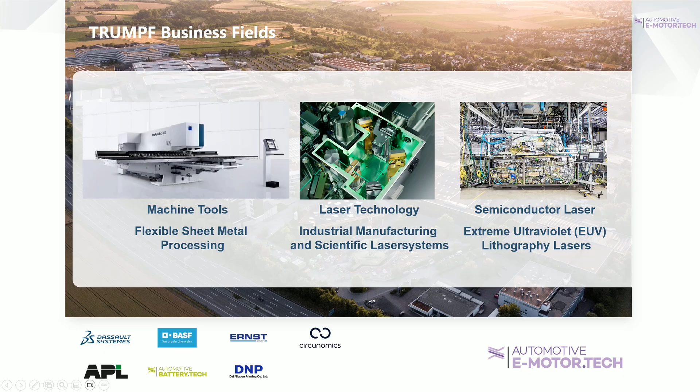So for those who don't know TRUMPF, we're like a family-owned business. We do laser technology. It's all about the lasers. We're in the main markets, etc. Our HQ is nearby Stuttgart. That's all the facilities where we make the lasers and do some of the machines. And our main areas are machine tools for sheet metal, the laser technology, which is the biggest chunk in automotive, and semiconductor laser.

And maybe some of you have heard about what's being called the EUV laser. This is the one going to the Dutch company ASML, which is used for producing the latest generation or the future generation of microchips. And this is our former CTO here, Mr. Leibinger, who's one of the families running the company. And he was stating that without this laser, Moore's law would have come to an end, which has a big economical impact, and is certainly a technology that, if you have it in your hands, also raises interest from politics, etc.

And that's why if you walk the Brandenburg Gate, there is one TRUMPF flag flying over, and this is certainly not an office for selling lasers, but to talk to the guys who are interested in that technology. Yeah, and that's basically our operational mode. So we do lasers, we don't do the machines. So in that case, it's ASML. And in the case of the automotive applications, it's usually some machine or line builders which just take our system as a core component in order to do something which wouldn't be possible in any other way.

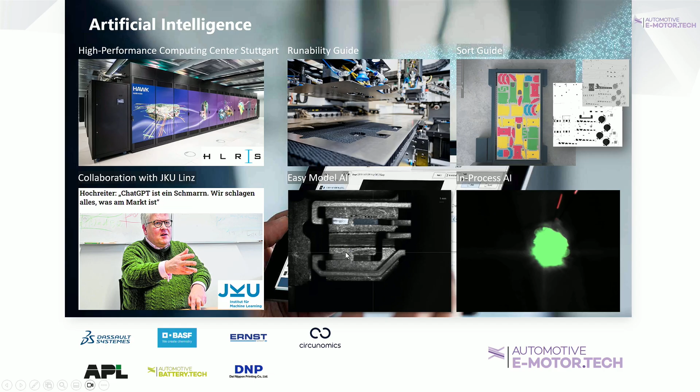At the moment, we're focusing pretty hard on everything which is somewhat related to artificial intelligence. Most of the time in order to improve our systems, to make them run much better. I will show you one of the examples later on. So this is like high-performance computing. We work with some of the masterminds in AI. So, for example, Dr. Hochreiter was one of the guys who actually gave ChatGPT the core programming stuff and got no money for it. I think he's pretty much upset about that, but he's still working at advancing his stuff. And so we have collaborations with those guys.

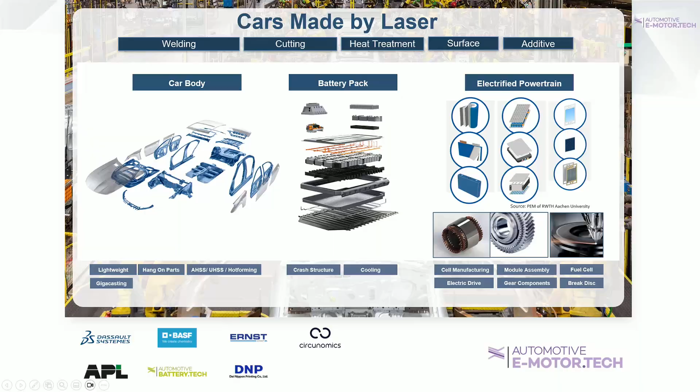In the cars, lasers have played a role for the better part of the last 20 years. So there's obviously a lot of applications in the car body. This is like welding doors. This is cutting of B-pillars, where there's only the laser cutting available. And of course, we do dedicate to e-mobility. That's why there's a lot of applications in the joining and contacting of the battery packs, and even more specifically in the electrified powertrain. So battery manufacturing all the way, fuel cells, and you can think of all of the components which belong to a drivetrain, including, of course, the electric motor.

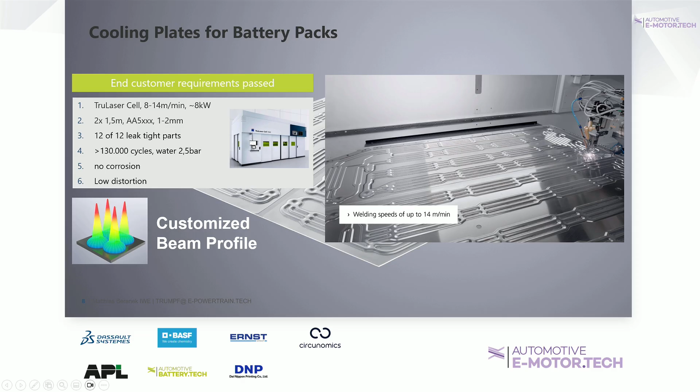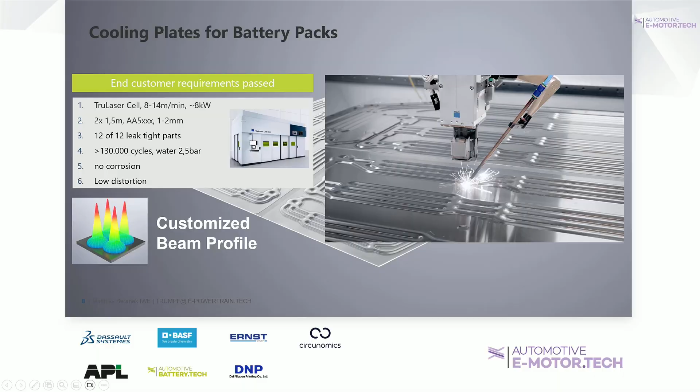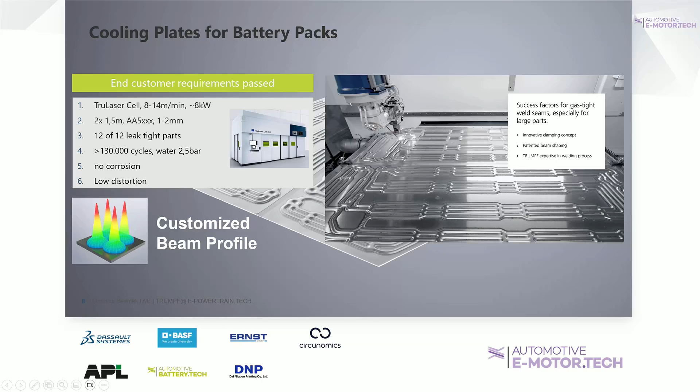I brought you two examples, just so you see something different than an e-drive. In this case, this is a cooling plate for a battery. So that goes under floor. And what needs to be done there is actually to have a liquid tight welding for a few 10 or a few 100 meters of seam length. And for that, we have developed a new technology. So usually we refine already existing industrialized laser systems to take over a new application, a new topic. So in that case, it's liquid tight welding with a special sort of laser beam arrangement.

And then, while we're at it, we also carried it over to, for example, power electronics housings. I don't know who's familiar with welding in here, but die cast welding is one of the most difficult things because it generates a lot of porosities. And we successfully carried over that technology to seal off inverters or BMSs in order to actually get gas tight, because that's a specification we got. We dealt with it, and so we can apply this technology to different applications.

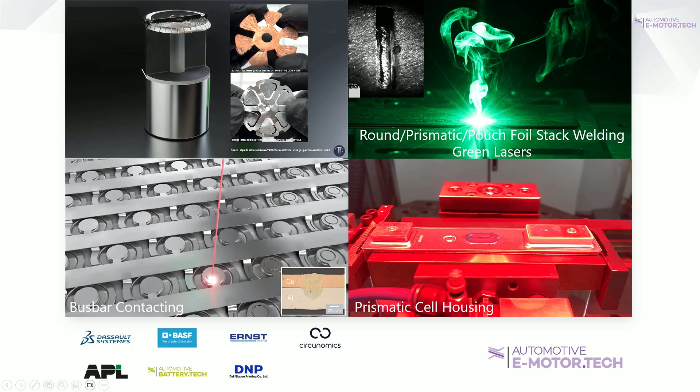We've developed special lasers for that. They're actually green, so you can see that. And that has to do with the susceptibility of the copper material towards green laser light, so it takes in the green light more efficiently than any other high power laser light.

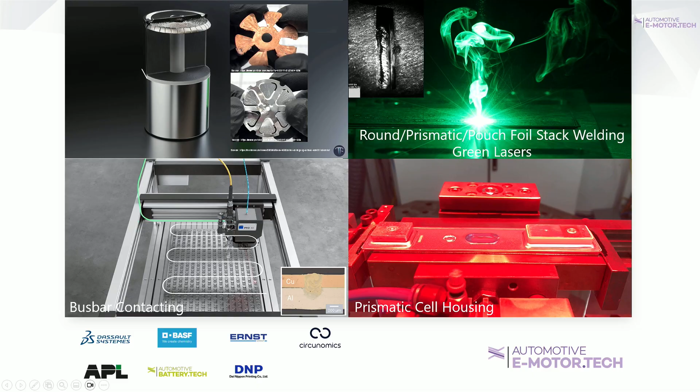Then the busbar contacting, this is very popular for each type of the battery cells, whether it's round, prismatic, or pouch. There are always busbars also on each level of the battery build. And you can see that this is being done with so-called scanning optics. What's nice, in many cases we can just mix the materials when using the laser. So welding copper to aluminum is quite a common thing to do there. It's working quite well. And this is due to the specific arrangement of the laser.

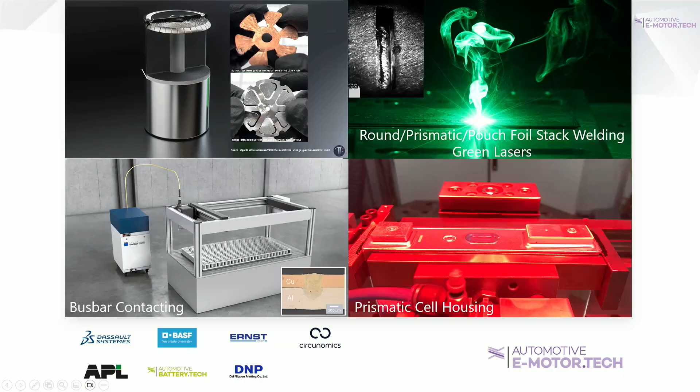And here you have to look very closely. This is the next generation of prismatic cell housing welding. This is a very, very popular application. And you can see that the next generation of that will be 3 times as fast as it is today. So very quick.

And for example, the differential is one of the parts which has been laser welded for 20 years or so. There's a very high experience for that, so you just have to go for it. Also very close to the E-drive then is of course the inverters. And there is an increasing interest in replacing the bolted connections by a laser welded connection.

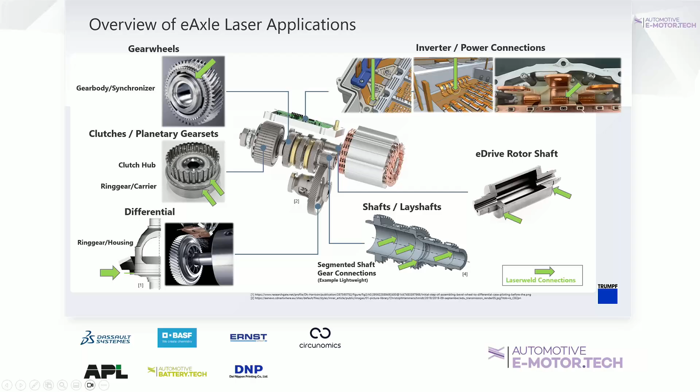All right, and then we have the E-drive. This is what I'm talking about in depth today, where mainly for us it's the hairpin technology, because that's been used by literally anyone now, at least for the larger productions. And the main application is of course here the welding of the open ends, hairpin welding, and also the decoating, that is welding preparation, you can say. The connection of the phase connectors or busbars, and you also see that here a little bit.

Also the stator cores are being laser welded. That's most of the time being done in tier 2 or tier 3 suppliers somewhere, but they also could or would be using lasers.

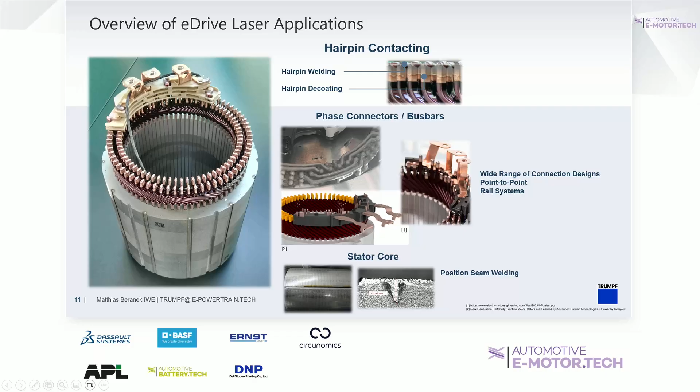All right, for those who don't know, I will very quickly take you through the processing chain. You can see it's rather long. The laser is here, so the crown welding and the contacting. And this, unfortunately, is a point where the product value is already quite high in terms of value add. So we are most of the time not really allowed to have any failures. At the same time, we have a very, very high number of connections.

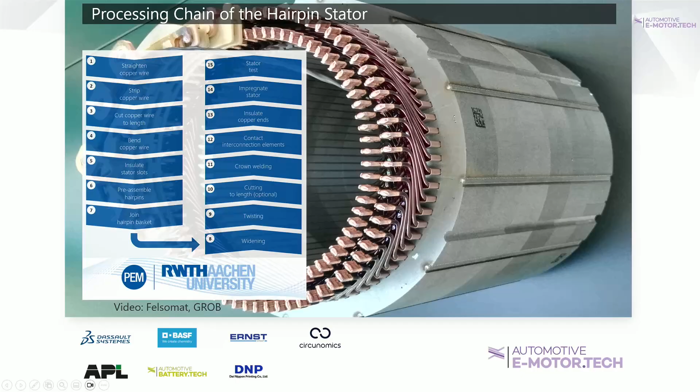So if I think 10 years back, there was one part, one laser weld, everything was fine. If one part was bad, you just threw it away. That has long been gone. And that's what we've been dealing with for the last 10 years, you can say. Right.

First step is the so-called forming. So that is all which leads to actually having the U-pin. What you could see here is a sequential machine. Right now, in that case, the Wafios company is capable of producing 1 pin per second. That's the cycle time of those machines right now, which includes already that laser decoating operation that was not seen in this video, but it's there.

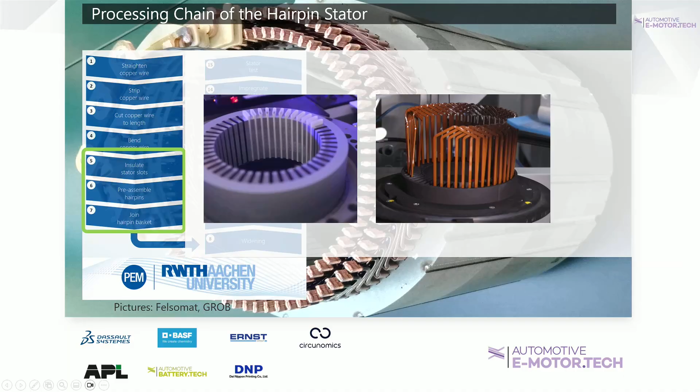Then you prepare the stator core, so you put in the isolation paper, then you arrange the U-pins to put them by means of grippers into the stator core. And then you have the two processes, one of which is the so-called widening, and the other one is the so-called twisting to have that distinctly twisted crown on the upper side. And then I just skipped the laser welding for a moment.

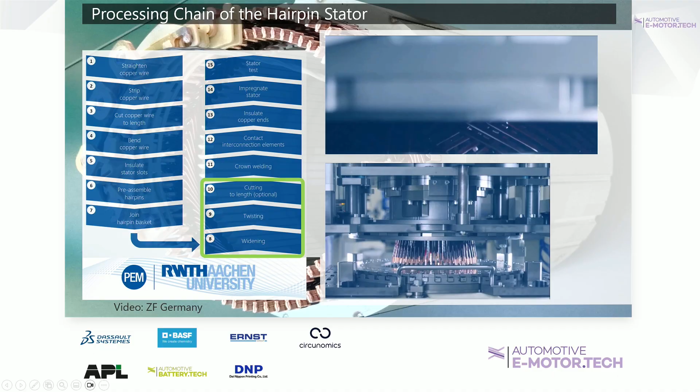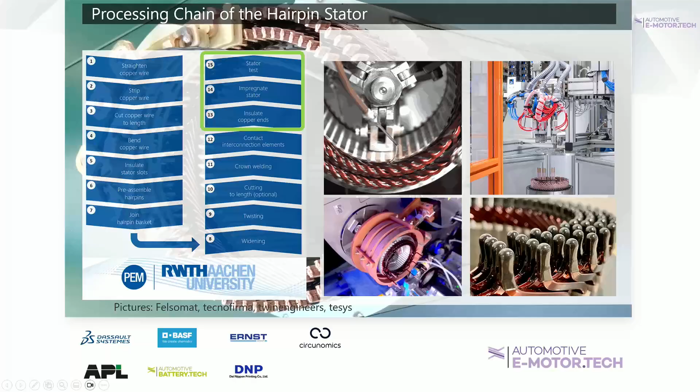So after laser welding, there's only very few steps left. All of them have to do with isolation, either of the welded open ends or the trickling and isolation of the whole slots. Both of them are working with inductive preheating, so you heat up the part, you apply the isolation layers, in that case liquid. In that case, it's like powder dipping, and this is how you go to your isolation, and after that, there will always be some sort of end-of-line testing.

All right. As I mentioned already, the part is very expensive once arriving at the welding station. That's why it's not only a laser which is used there. It's a whole system with a lot of sensors. So we got the laser beam source supplying the light for the welding. We have scanning optics. And then there's a whole battalion of sensors. In any case, I will show you the positioning sensors and also the OCT, and also how we apply the AI and some of the adaptive processing.

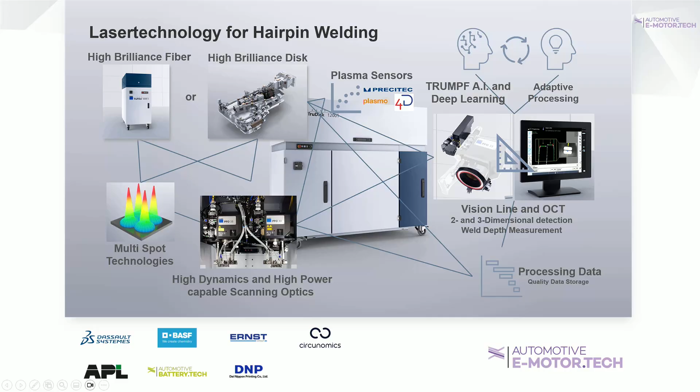Like I said, the laser system, as just shown on the previous slide, is closed. So it's capable of running autonomously, more or less. What we need is only a start-stop from any sort of machine that is supposed to weld that stuff. And this keeps the system open to a lot of machine building companies who are capable of supplying production lines. This is why we scaled so quickly, especially in Europe. And that's also why we can adapt to new sorts of motor designs, like the axial flux motor, for example. I've got an example later on for that.

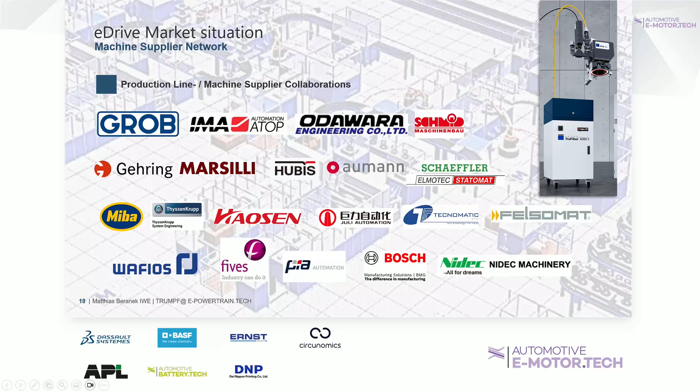And all of those companies have done several projects already. Still, the biggest player, at least in Europe, is certainly the Grob company. They are very famous for producing hairpin stator production lines, and they will use the laser system at one point.

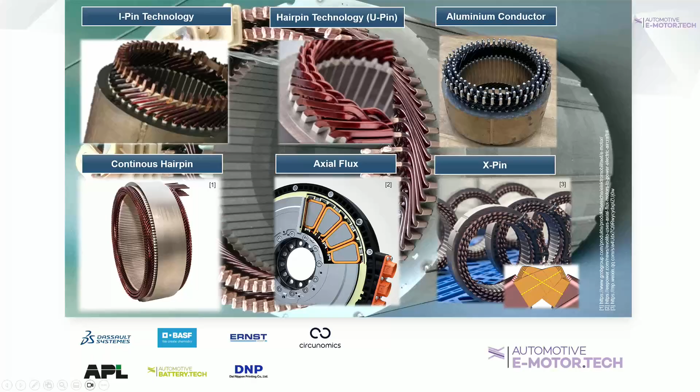Welding-wise, we have developed approaches and processes for each of the types you can see on this slide. I will show them later in more detail, and most of the time it's just about the adjustments we make, for example, for the parameters, and a little bit for the welding strategies we apply. What's good is that the specific system we're using would be applicable for all of the shown products.

Right, at the moment we have 700 high power laser systems installed worldwide, which means we scored pretty much every project. And that should be somewhere between 300 to 350 production lines already.

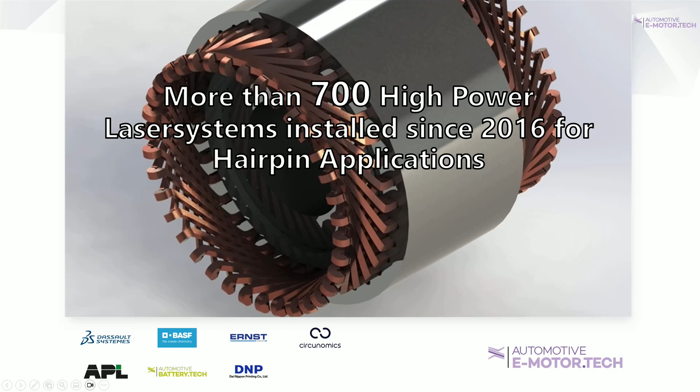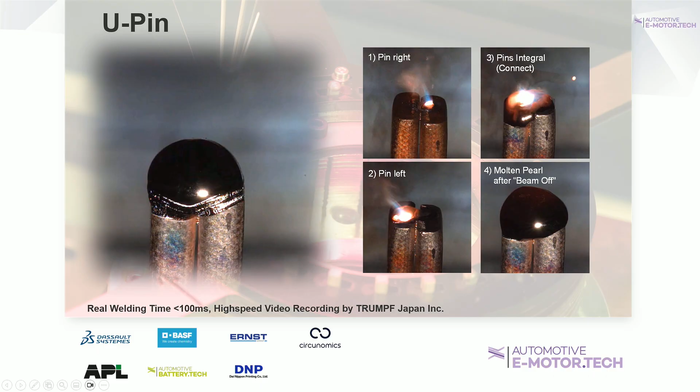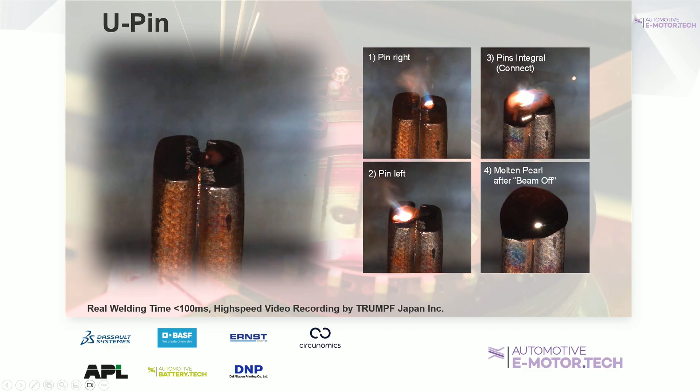All right. So just so you've seen one of the contactings, we usually use a strategy which is melting the first pin, then the second pin, and then there is some sort of integral movement over the 2 pins in the end. All of the videos you're seeing of welding are high-speed videos, so in that case this was a 100 millisecond weld. Then you do this 200 times, and then you got a nice little stator ready for putting in the car.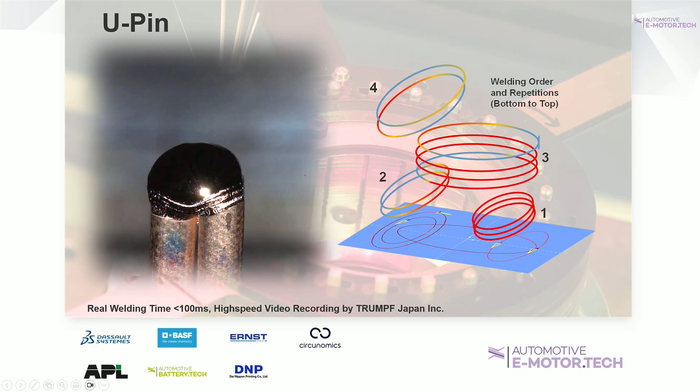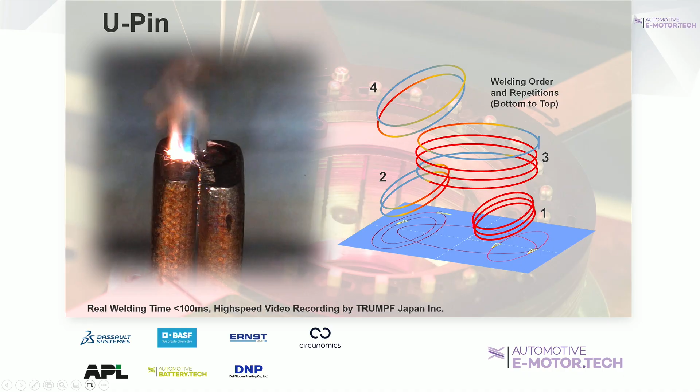The laser is highly controllable, so that's an example sequence of the weld. You can see we do some jumping around. We can also control the laser power along the single paths. The laser light is actually the quickest. We can regulate it within some microseconds because it's a real-time path and the speed of light is obviously very quick. So we can even do fine-tuning like that.

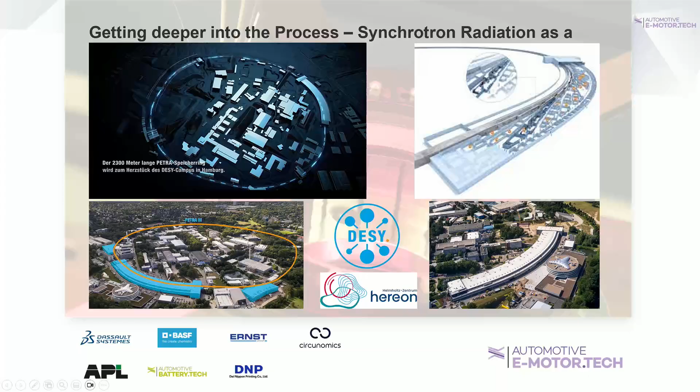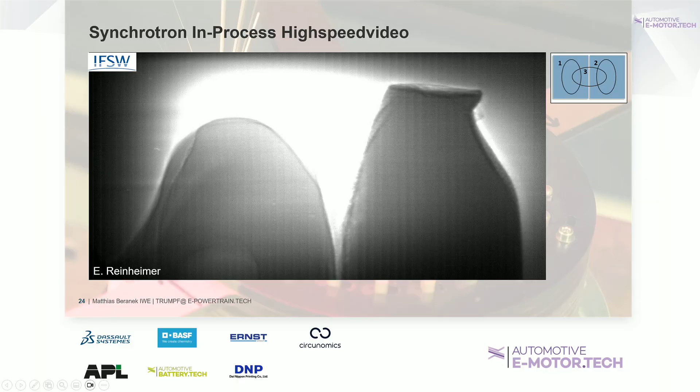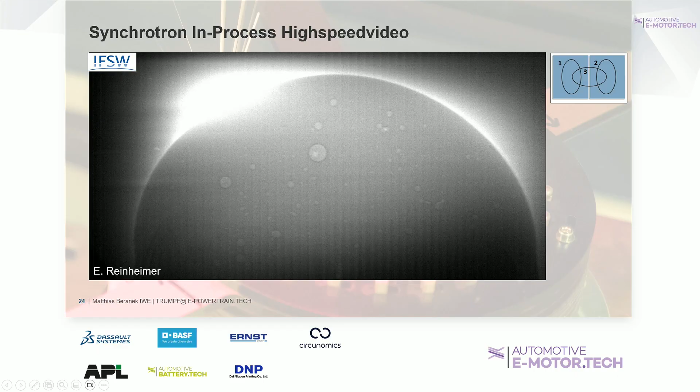And to get even deeper into the application, that's the synchrotron facility in Hamburg. It's a particle accelerator. And we pretty much misused it to build a high-speed camera based on X-ray, because the particle beam has very high energy, so we can do an X-ray through the parts while doing the welding. You see how the laser is going in here and how we connect the part. You see how porosity is formed during the weld and also how the porosity is removed during the weld. To get the understanding necessary to do that process properly, we have to go to quite some lengths at some point. But it's also a lot of fun, I can tell you that.

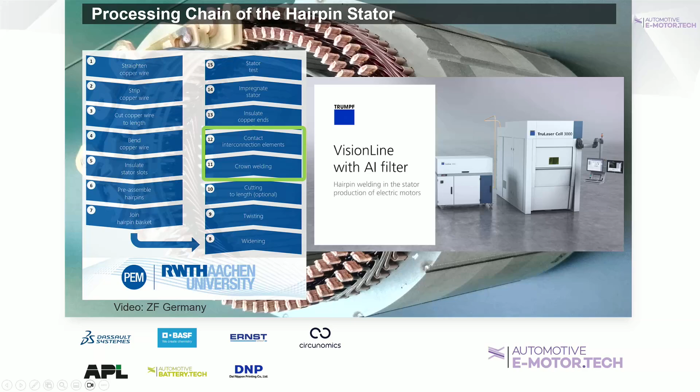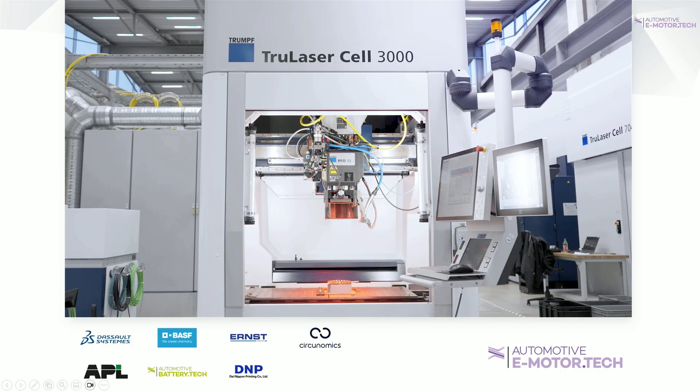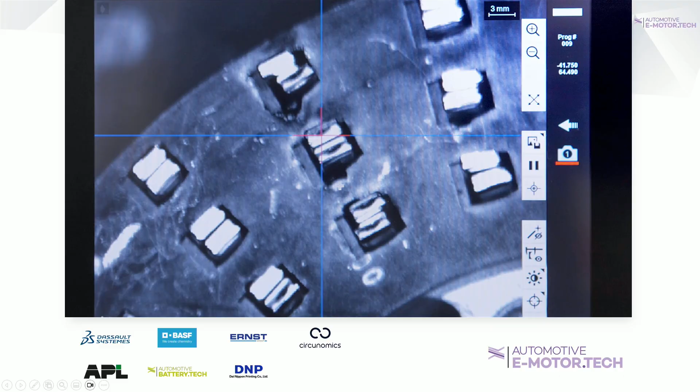We have the sensors, which I mentioned. We have a camera, and camera detection actually was based on grayscale, edge finding, and so on. We changed it, so our detection is completely based on AI. And just so you've seen a welding process going on inside a machine, that's the optics again, with all the sensors in there. That's me. And this is how the thing is programmed. It's not that interesting, but what is interesting is we detect all of the pins, either sequentially or all at once. There can be different modes. And this here is showing what the problem is with the standard detection.

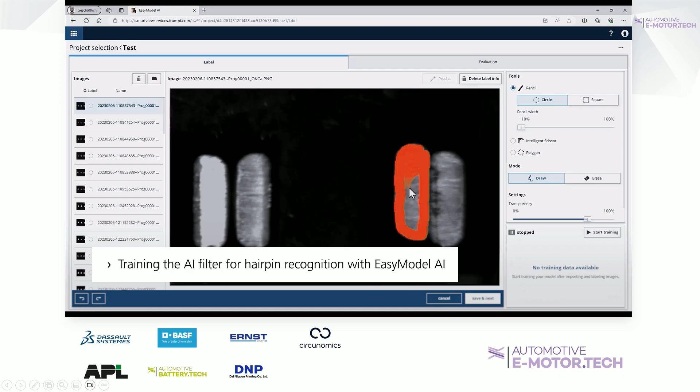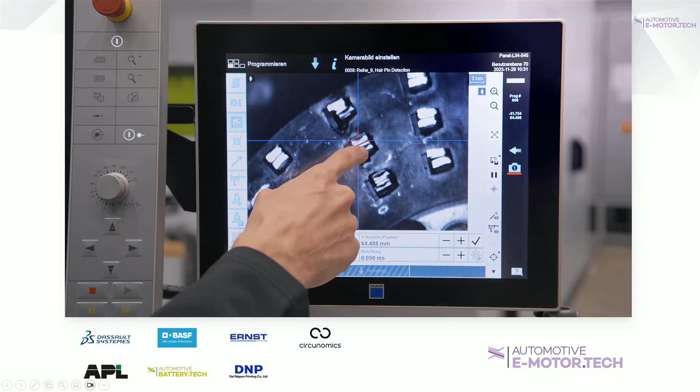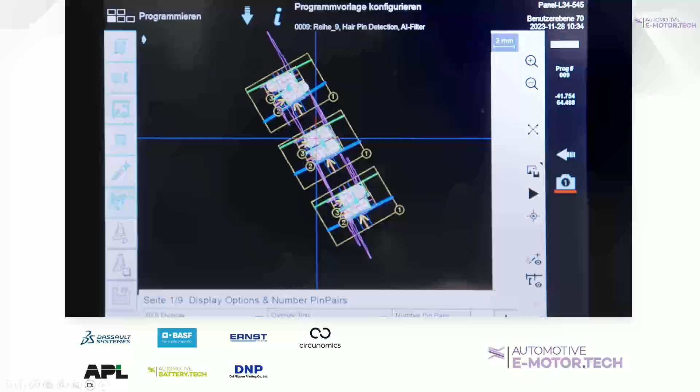And we solve it by AI. Here you have how we train the AI, actually. This is by manual labeling in the first place, where we have developed a very good few-shot learning, which means we make 2 or 3 manual trainings, and then the AI can already work on predicting the parts. And then we basically just switch it on, and magically there is no more problem with the detection.

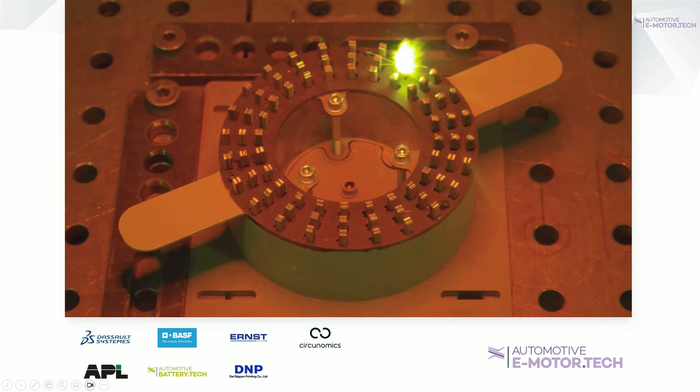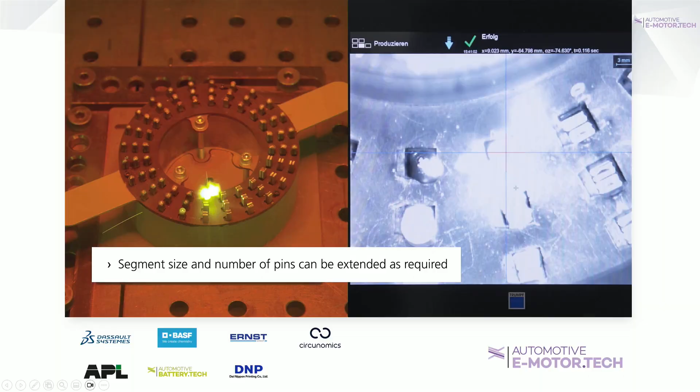And this was basically something we, of course, had to deal with for quite some years in the beginning. So there were always some faulty measurements, stuff like that. It's just about the statistics. If you make millions of detections per day, certainly one of them will go wrong. And we've brought down the failure rate quite dramatically by applying that AI. All right.

So then we have a little extension. So we not only use it for detecting the parts, we also can use it for controlling what has happened, to check on the result. And so what you see here is, of course, a mock-up where we applied different failure modes within the stator and just trained the AI to also detect failures.

Because what's possible in the welding station still is that at some occasions we can apply what's called repair strategy, which means that you have the chance again to bring up the yield rate a little bit more, to make a part which otherwise would have to be reworked or something. You can still weld it within the welding station. And so for that, we use the advanced detection here. So that's also a feature which is possible.

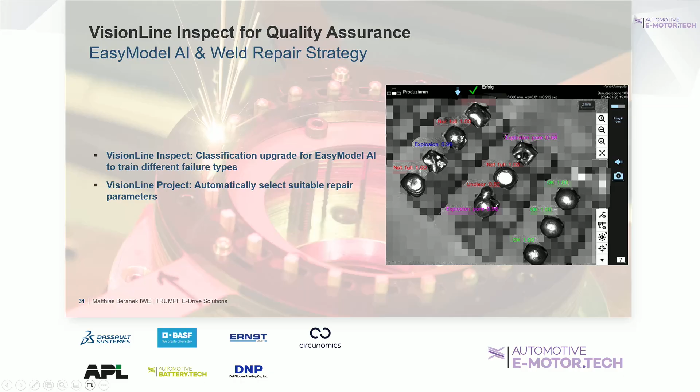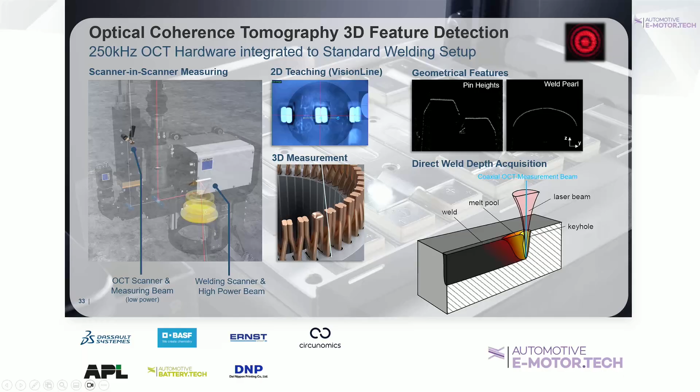Right, and then we have optical coherence tomography. So that's now a direct measurement. You also see it's a different sensor. So that's also a laser beam, but it's more or less powerless. It's like a measuring beam. And besides just scanning for geometrical features like height differences or the welding result, you can also measure the weld depth, which has been considered like the holy grail of laser welding, to actually get to this very concrete and good information. That's basically the most information you can get out of a weld.

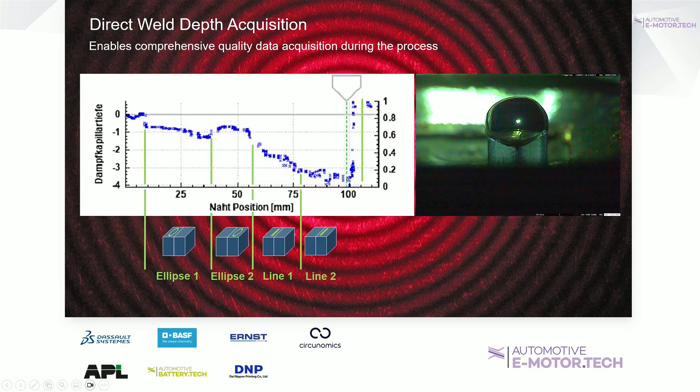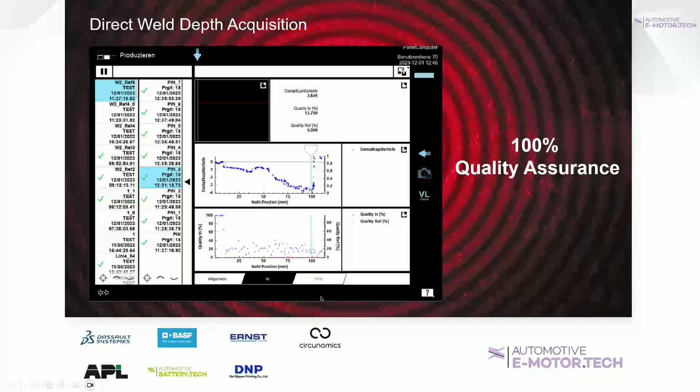And here you can see it going down. So the welding depth is basically gradually increasing as we go on with the welding on those pins. And this is pretty much the first time we get this high degree of information out of one weld. And that's also the point where we can actually go to a 100% quality assurance, because that's running with each and any pin, and that's not possible in today's production. Today's production is sample testing, most of the times using a CT scanner, which allows for only a few parts per hour maybe, and we would be able to detect any weld which is going on.

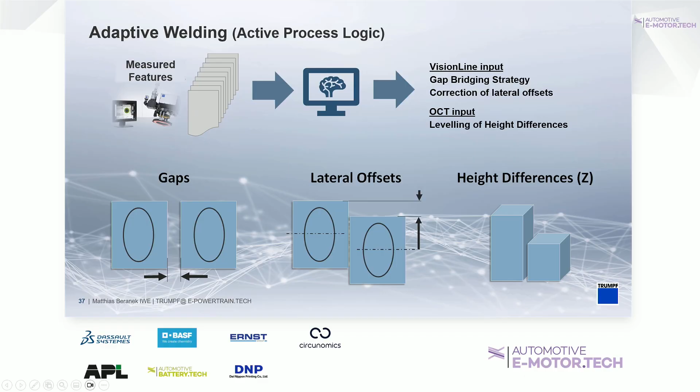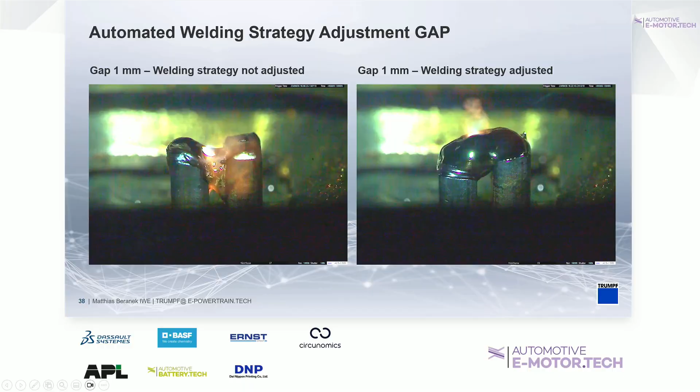Yeah, and with all that information, we also go into adaptive welding, adaptive processing, which means once we got the information from the camera or even from the OCT, we can still try to apply parameters which are more suitable to a certain situation which can occur, which I've pointed out here. So those are the typical things which can happen in a production environment. And what we do then is to automatically adapt either the strategy or just some parameters of the laser in order to get to an acceptable welding result.

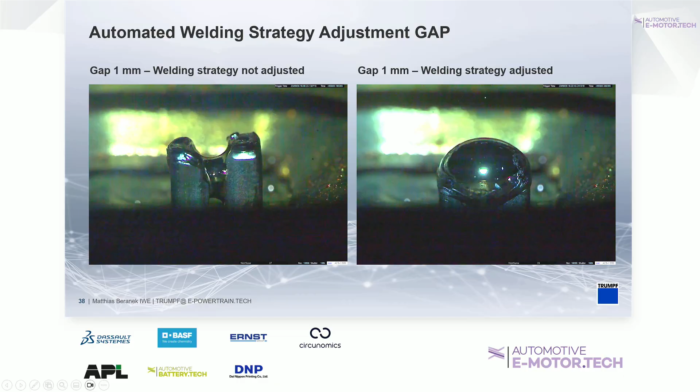So you can see that this is the more common case. So if you have very strong deviations in your parts, that's certainly not a good welding result. And on the right side, we've just used the information coming from the pre-measurement indicating that there is a gap, and then we adapted the parameters in a way which are suitable to bridge that gap. And similar can be done for all of the other deviations. And you've seen that's a full 3D compatible measurement mode we could apply. So we got all the information even before we start to weld one of those pins.

Then for the trends, what's actually very common, of course, is the U-pin. So pretty much every OEM has some sort of U-pin stator on the products. What we do see, especially in China, is the so-called X-pin and mini-pin. Those two concepts are basically targeting to reduce material use because the pins are cut shorter, which also means that the head height is reduced.

The state of these applications is basically for the mini-pin that it has a good feasibility, where your processing window gets a little bit smaller for the contacting, but it's very handleable. With the X-pin, from what I see, the yield is catastrophic.

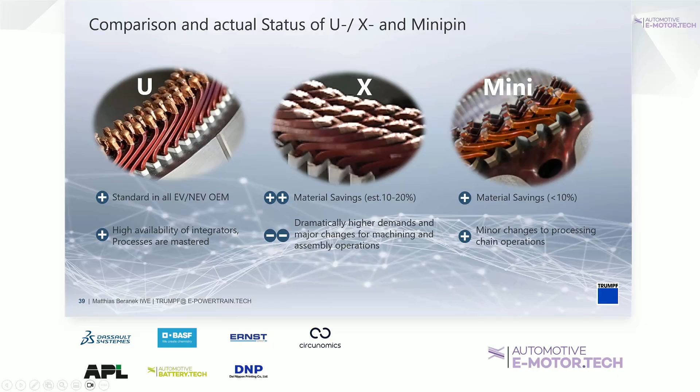So that concept is certainly not really ready to go to a full-scale production. It's very hard to adjust the single processing steps to the demands of that. So at the moment, it's quite hard to get to a good output.

For the mini pin, I will give a little bit credit to the Schaeffler company. They have shown one of their products at the IAA, which was a few weeks ago, and I'd like to see that. You can see the welds are pretty localized. So for sure, if the pins are shorter, we can only put in a certain amount of energy which fits to the volume we want to create. So here in that case, there is no welding pearl as we've seen in the other examples.

We have produced aluminum winding stators, and I'm pretty sure, or at least I hope, at the next conference we can talk already about serial products. I have high hopes. I do see the projects. Of course, smaller scale and so on. But obviously, it's an attractive alternative when the use case is right.

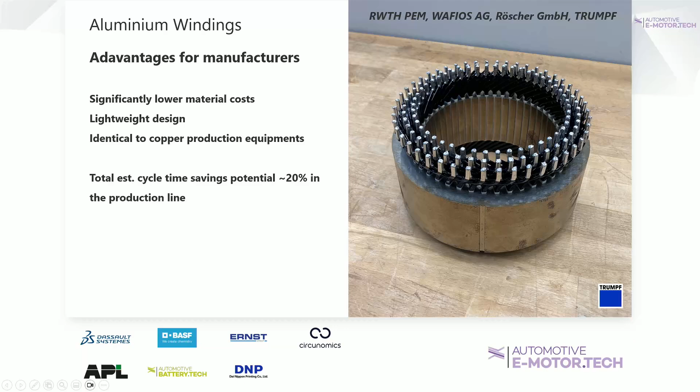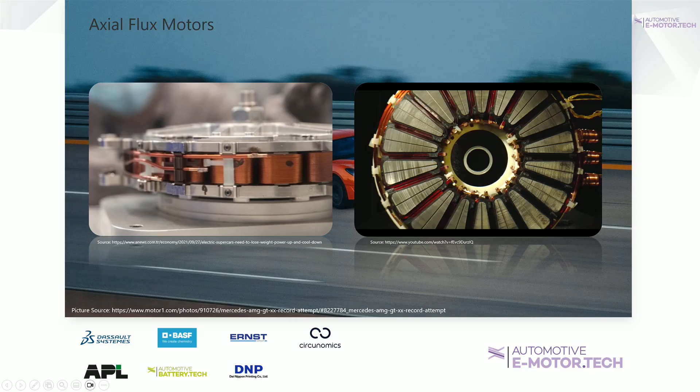Okay. And the last thing I want to talk about, just because we've just had some very nice records with that, is axial flux motors. All of that stuff is all around the internet, so I just made some screenshots. Axial flux motors are a little bit different in terms of the workflow of the processing chain we have. We did some adaptations connecting-wise, or for what the lasers have to do. It's not that tricky. We can deal with that. There are quite some smaller differences.

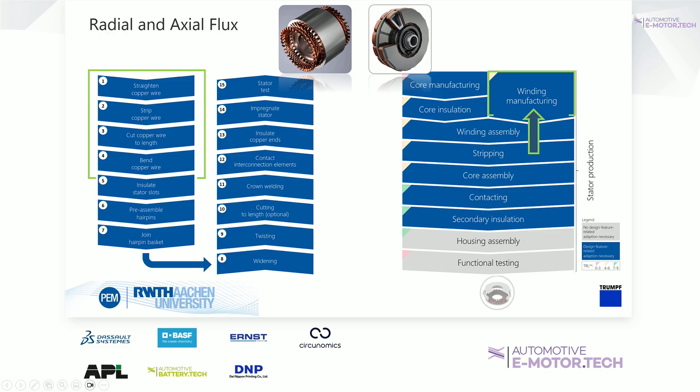So on the right side, I pointed out the processing chain for the axial flux motor. We do see changes in how the coils in that case are manufactured, and the contacting is just a little bit different. So I give you an idea about that. So for the forming, instead of U-pins, we have to create the coils. And then the finalized coils are assembled to the cores, and then the contacting is happening. So the order of how you do things is just a little bit changed in that case.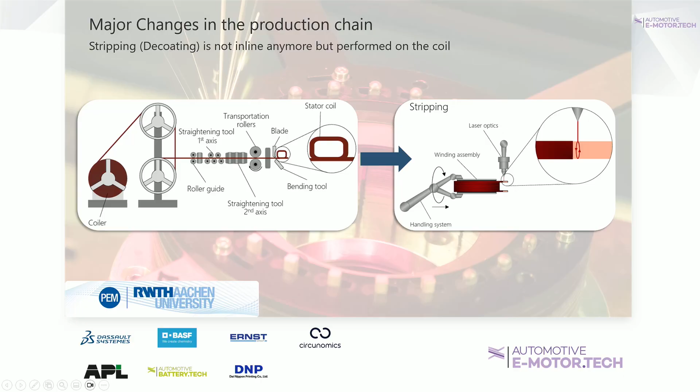And in the welding, it depends on how the design of the axial flux motor actually is. So if we have different orientations of the open ends, you have to have something which can manipulate the part, so the stator in that case, in order to reach the pins or the connections. Also the phase connectors, they're usually put on the outside of the stator, as well as the terminals. So you have to have like 2 or maybe 3 different poses in order to finalize the welds.

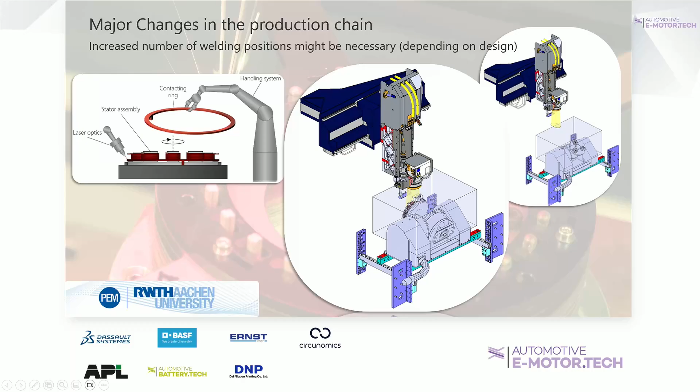The good thing I see is usually that there's less connections compared to the U-pin stator. So we have concepts for that, and you can imagine at some point we will see a serial product quite soon.

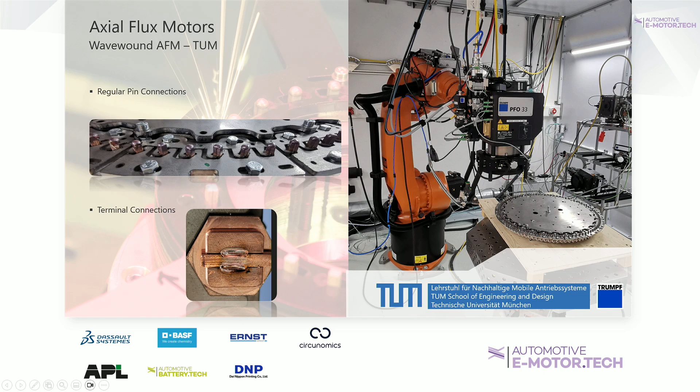Another example is actually a wave-wound axial flux motor, which I had in the lab just some days ago, which is from a university, but in that case, you can see the orientation of the connection points is just that you can work only from the upper side. So there is no reorientation necessary. The welds are pretty straightforward. And here you can also see how we connected the terminals. So if you do the design a little bit different, and let's say production orientated, also the axial flux motors can be straightforward.

Right? That's pretty much it. So what I've shown you is that there is nothing in e-mobility which is without the laser. That for the hairpin motors, we have established concepts. We just have to do it. And that most of the technologies are specialized or tailored to the application. And you've seen that AI is coming, of course, data sourcing, quality data storage, all of that is increasingly demanded. So that's what we're dealing with.

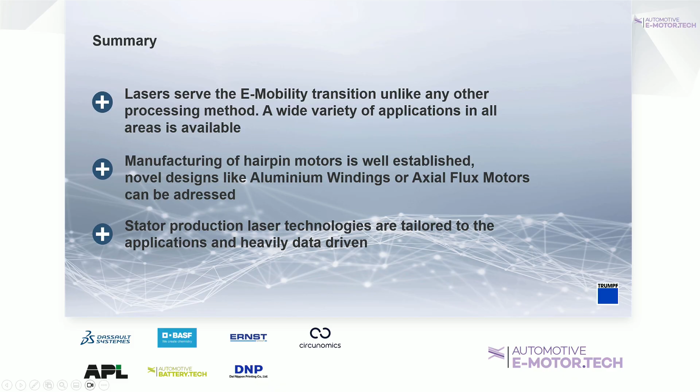And if you want to try, because usually the laser is a little bit more expensive in terms of invest, we offer to try everything. So you can see that in each main market we have at least one lab where we usually go for feasibility testing or testing of one of those sensors, which are also crazy expensive in most of the cases, just to make sure it fits for the application intended.

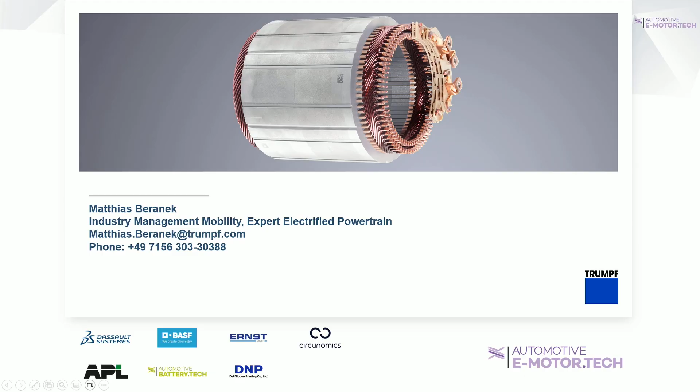Okay, thank you very much for this interesting presentation.